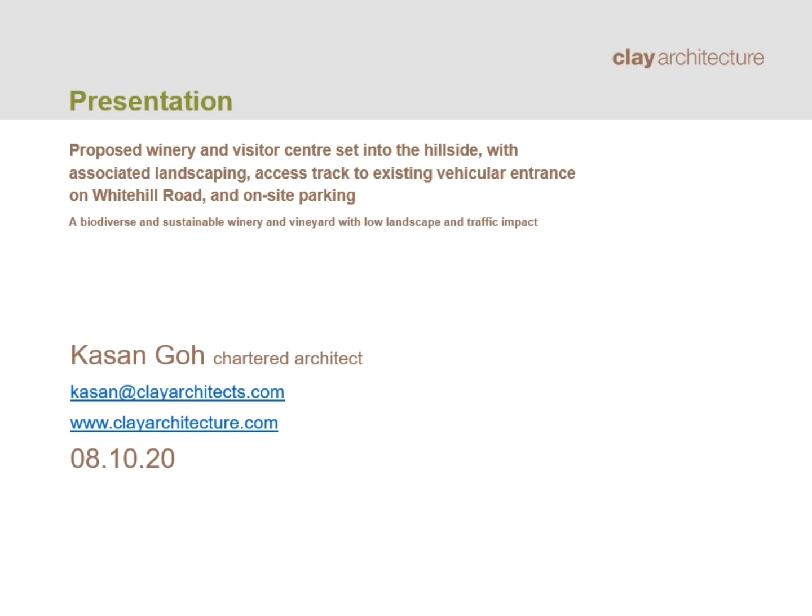It's a 25-acre site on a hillside. Of the 25 acres, only 5 acres have been cultivated with vines. The applicant is seeking to expand its vineyard, and this is being held back by the fact that it has no on-site facilities. The success of the vineyard depends on an on-site winery and a visitor center, which they would use for wine tourism. The site is set within the green belt, and it's opposite Kent Downs AONB.

The site for the winery was chosen through consultation with Gravesham Borough Council, and it was decided that the best place for a winery would be in the northernmost corner of the site, surrounded by tall trees and a hedge.

We carried out pre-consultation with Gravesham Borough Council, and this included preliminary highways comments from Gravesham Highways. We had pre-consultation with the Kent Downs AONB officer and pre-consultation with the Kent Biodiversity officer. On board our team, we have an ecologist, a civil engineer, a transport consultant, and an acoustician. Kent Highways will be consulted as part of the planning process. We are also applying to pre-consult with the Environment Agency.

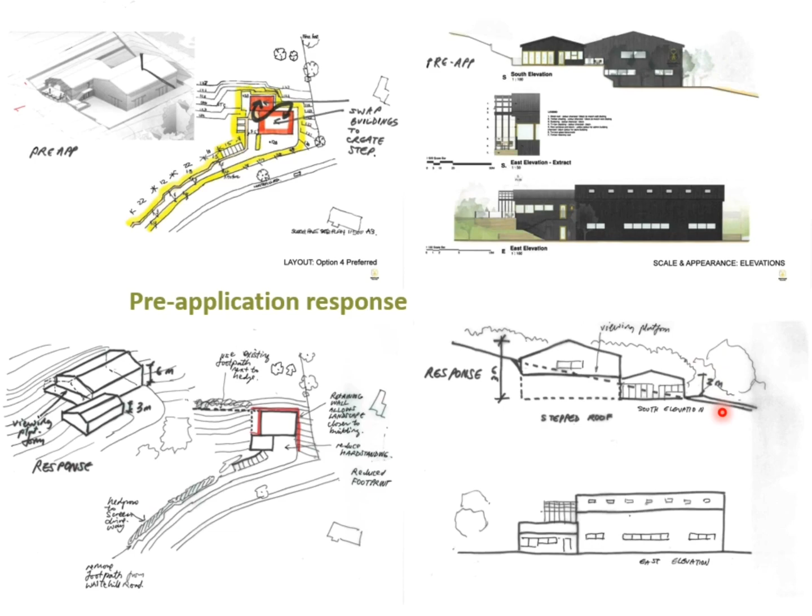So in response to Gravesham Borough Council's comments, you have the sketches on the bottom half of the slide, which show our idea of taking CC Studio's project, for instance, and moving the 6-meter tall building and burying it within the ground so that all you see is half of the building. This was an early sketch scheme of the idea.

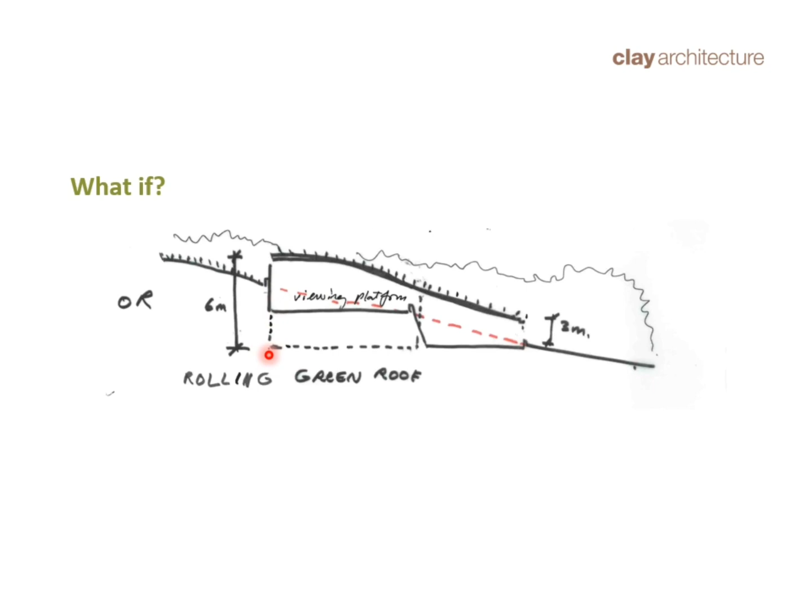However, after doing that sketch scheme, it occurred to us, what if we consolidated the building into one building rather than a 6-meter and a 3-meter tall building, but have it as one single building and set the whole thing in the hillside and design the roof to try and blend with the hillside more. This is something that we discussed with Kent Downs AONB, and they liked the idea.

Special grasses will be planted around the footpaths and within the vineyard, so the whole site will combine agriculture with biodiversity. We consulted with the Kent Biodiversity Officer on this at a very high level, and in principle they agree with the strategy for combining agriculture and biodiversity.

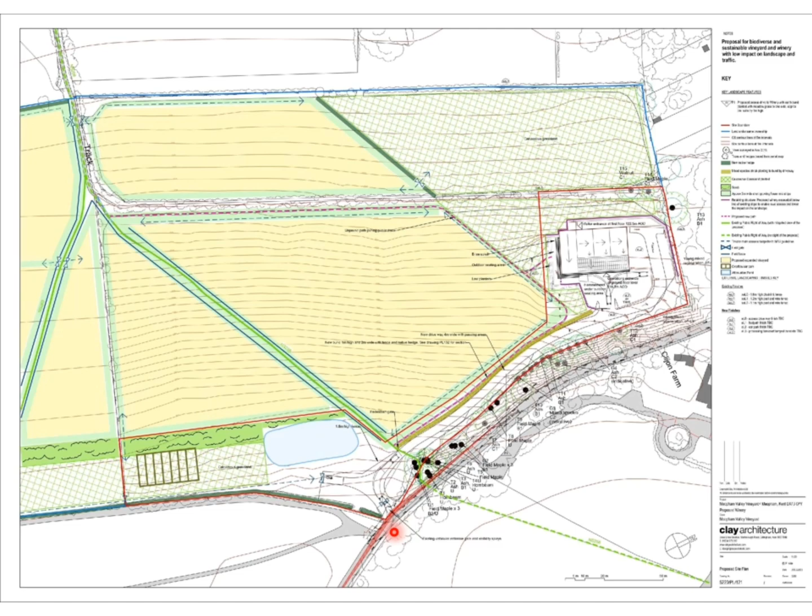Here we zoom into the site in greater detail. So that is your entranceway off Whitehill Road, a new driveway which is carved along the side of the tree line, and then this is the proposed winery.

So here we have existing footpaths which we're not changing. We will create a crossing across the driveway.

The yellow areas are the extended vineyard. This hatched area here is the local wildlife area, so it will be enhanced wildlife area.

The idea is to excavate the hill here and build the winery into the hill. The spoil that comes from excavation will be used to build a bund that will not only mask the mass of the winery, but will also be used along the side of the road of the driveway, and that will be planted with hedgerows. So this would all reduce the impact of the development on the landscape.

The idea for the bund was actually suggested by the Kent Downs AONB officer. So all in all, you will have a building sitting on here which is excavated and put in, and then the spoil would conceal that, and you'll be surrounded by wildlife area and vineyard.

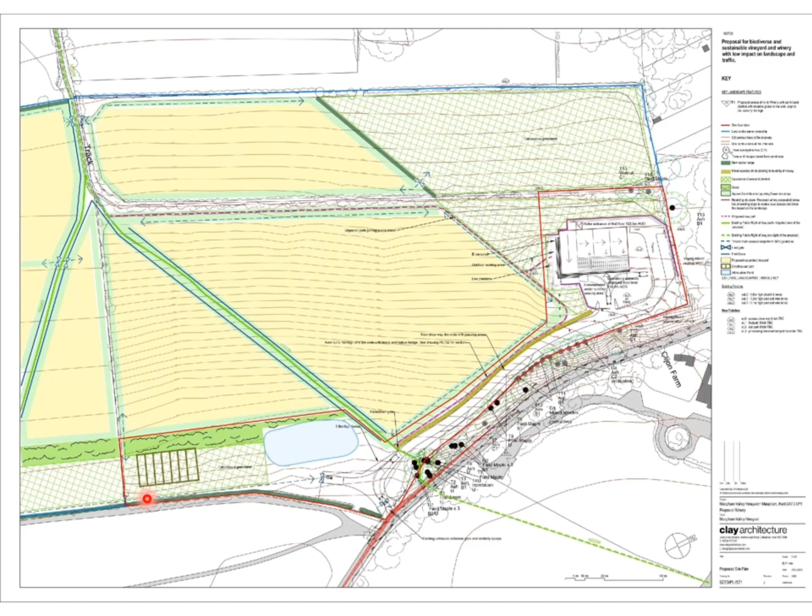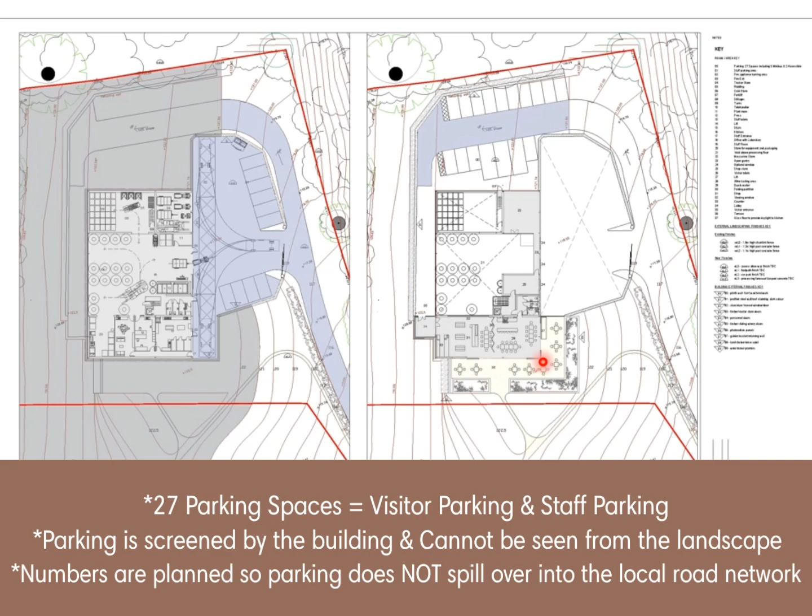So this area looks out over the valley and opens out onto a terrace. So you have outside seating. So in total you have enough seating space for 30 visitors on the inside and 30 visitors on the outside. Total of 60 visitors.

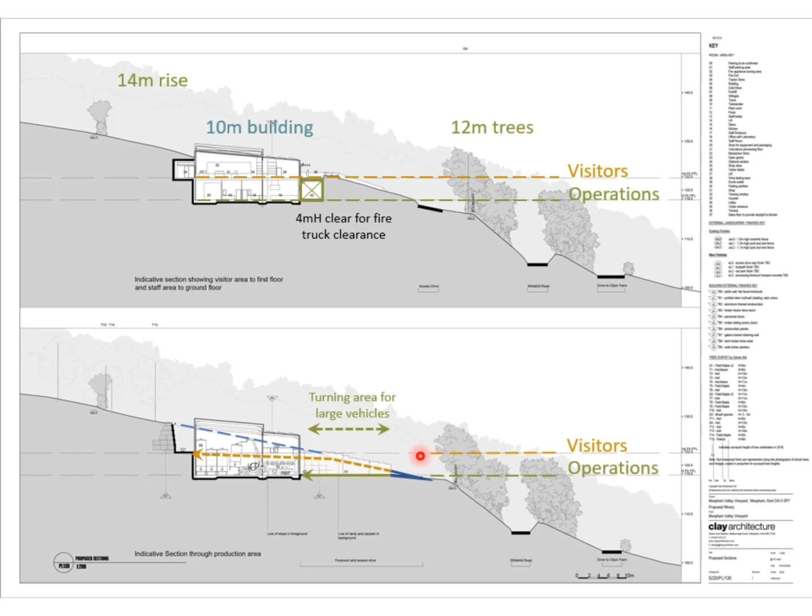This is a section across the building, which shows how the building is set into the hillside, with the wine production area at the lower kind of operations area at the lower ground level, and the visitors at the upper ground level here.

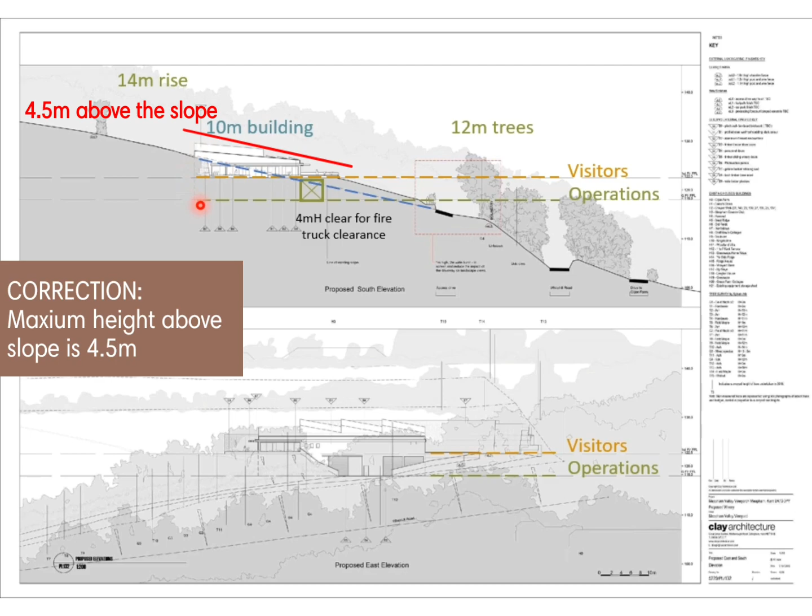This shows a detail of the view from the south, which is equivalent to the view from the Greenbelt area. And it shows again, this is all of the building that you would see from the south, which is the upper floor area with a maximum height of 4.5 meters sloping down. And you can see from the green line here that most of the building is hidden from view.

Below, this is the view from the east, and again, most of the building is hidden from view. These white lines here are the surveyed heights of the trees in 2018. The trees were about 12 meters high, and would have grown taller since. So this is the tree cover, and this is roughly what you see from the AONB site.

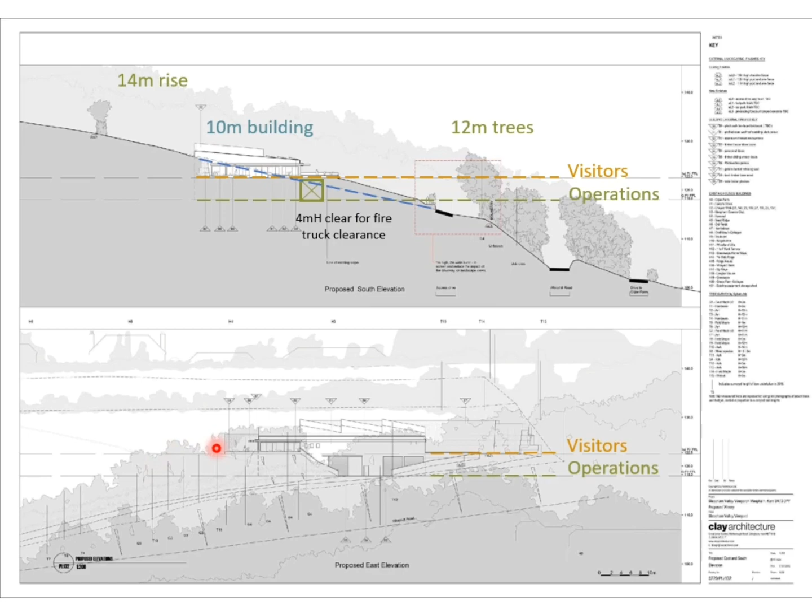Above here is a view from the north looking southwards, and again you see this little white bit here is what you will see. This is a view that few would see because it's screened by a whole wooded area, and the building is buried, so all you will see is that.

This is the view from the west, and again you see that the building is substantially below ground. Here's the building with the little roofs peeking up above, but that grey line indicates the slope line, and that line indicates the line of the operations area. So that's how much of the building you'll actually see, not very much at all.

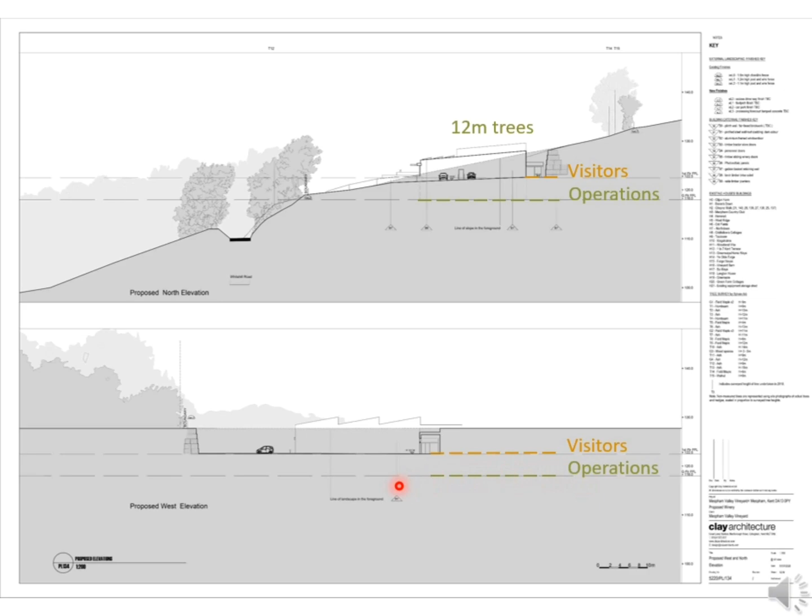To reiterate, this is the simulated view from the east. This simulation was built using actual trees and actual height and survey information, so it's fairly accurate about levels and trees. Here we show the view from the south again.

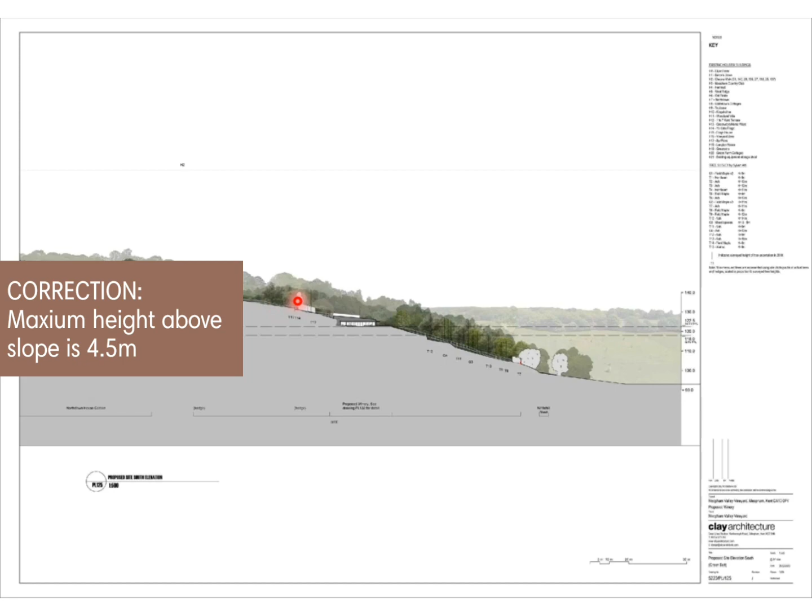Now you understand that only a single story, 4.5 meters or lower, shows above ground, and the rest is below ground. This is significantly less than the 6 meter tall building that was presented at pre-consultation with Gravesham. So at pre-consultation, the original design was a building 6 meters above the slope level.

The revised and submitted proposals show a building that is 4 meters or less above the slope level. The building is largely screened by earthworks, hedges, and the copse of trees along Whitehill Road. The proposed driveway will be hidden from view by a mound and new hedgerow.

We have had fairly extensive consultations with Kent Downs AONB. We're still discussing issues with her, but she is largely satisfied that the new proposals significantly mitigate the impact of the proposed development and will have a low impact on the landscape.

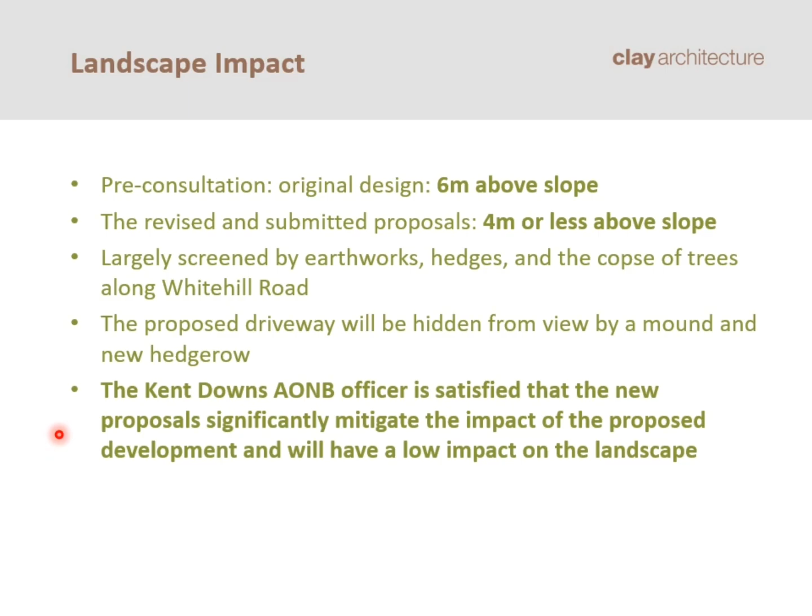The existing site, in terms of biodiversity, is mainly species-poor grassland, bounded with native hedgerows and deciduous woodland edge. The proposed enhancements include adding 626 meters of native species-rich hedges, adding wildflower grassland to the biodiversity area and to the attenuation pond, mixed species shrub border to the vine area, and calcareous grassland to the field margins and beneath the hedgerows.

There will also be grass species sown between the vine crop chosen to enhance ecology. We consulted the Kent Biodiversity Officer at a high level, and she agrees in principle with the strategy.

The interesting thing about biodiversity is that it actually improves the quality of the wine. It increases the resistance of the vines to disease and introduces pollinators to the area. So it is also very good for agriculture.

There have been some concerns about bottling. Bottling of the wines is a small part of the operations at the winery and does not occur all year round. A small bottling plant, for instance, can bottle up to 3,000 bottles per hour.

An entire year's crop, say 90,000 bottles, can be bottled in 30 hours, spread over a 16-week period. So we're talking about a week's worth of bottling spread over that 16-week harvest period. Bottling times will be staggered as white wines, red wines, and sparkling wines all have different processes and aging periods.

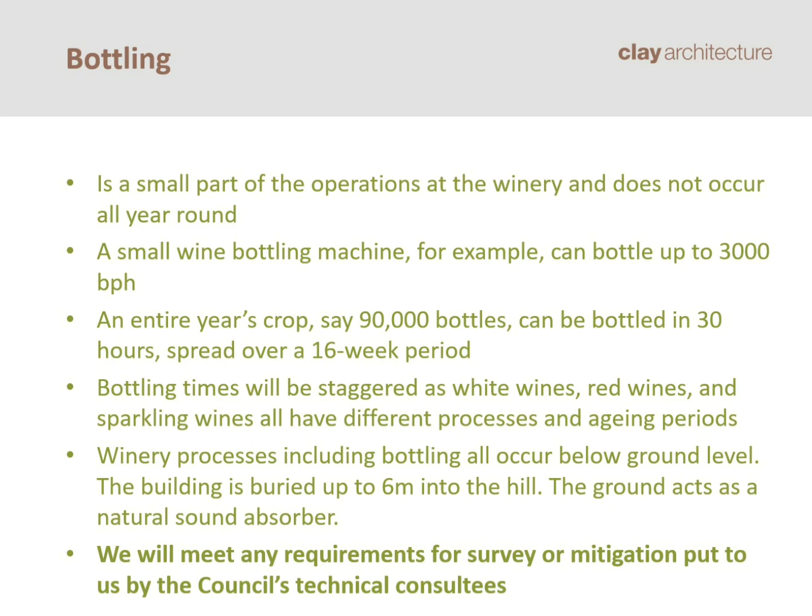We have engaged an acoustician who has made preliminary calculations into the impact of any noise. The noise to neighboring houses will be minimal. He estimates it will be about 15 decibels, which is hardly audible. We will meet any requirements for survey or mitigation put to us by the Council's technical consultees.

This is an example of a bottling plant used for bottling wine. We haven't gone into great detail here, but you can see even the bottling plant itself is enclosed, and that enclosure might itself reduce the amount of noise coming from the bottling process.

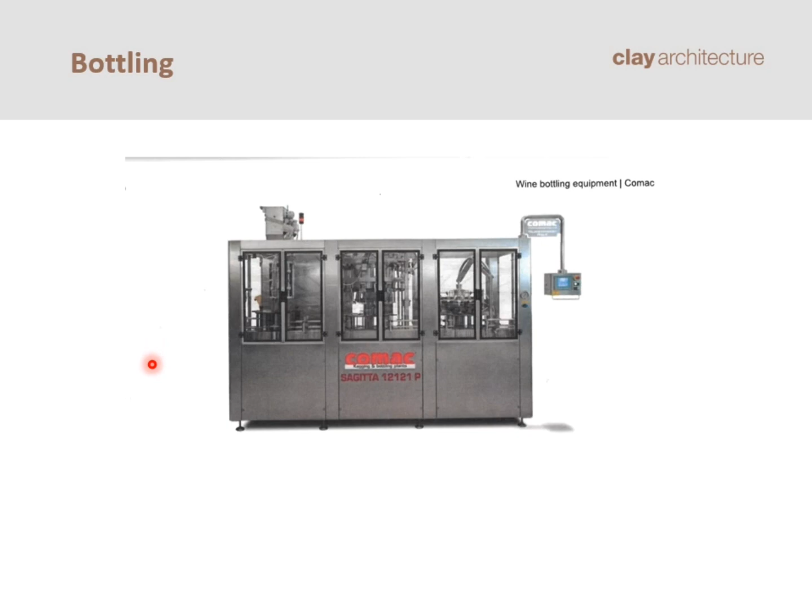This is an extract from our transport assessment.

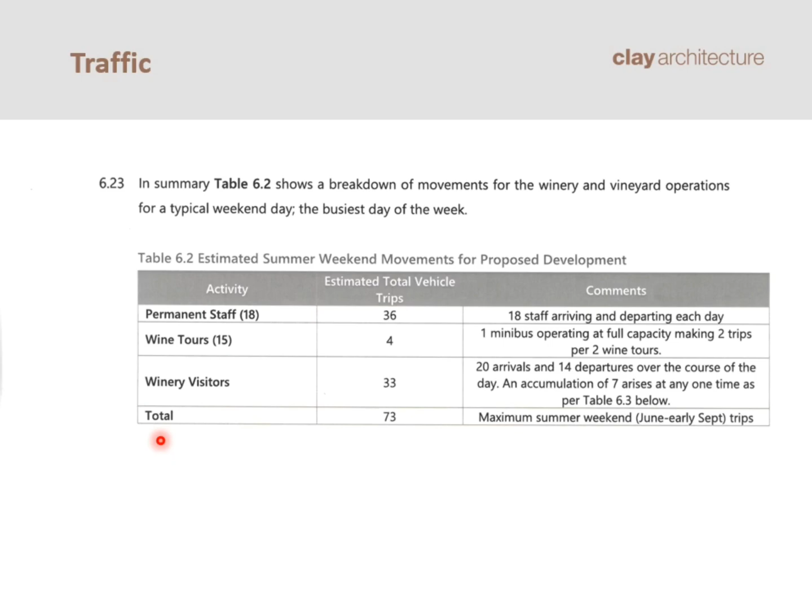The worst period for traffic coming to and from the winery is estimated to be during the summer months at weekends. During weekends you would have permanent staff manning the visitor center, wine tours, and visitors to the winery, calculated at a total of 73 trips per day during the weekend at the worst periods in summer.

Looking at the entrance, adequate visibility exists to meet DMRB standards, subject to cutting back the hedgerows.

Goods vehicles will have 1 to 2 larger vehicle trips per week during the bottling period of March to June. Deliveries and collections will mainly occur during this peak period, with a maximum of 1 to 2 vehicles per week. Most visitors and agricultural staff will be ferried to and from site by minibus, which seat 15 persons each. One minibus is equivalent to 7 cars, so this reduces the number of trips.

It's important to understand that most visitors will come through wine tours and wine trails, and the operators of these tours and trails do this exclusively by minibus. The winery also has its own minibus, which it uses to ferry agricultural staff.

We're investing in a minibus to collect visitors from the major train stations around Ebbsfleet, Gravesend, and Meopham, and ferry them to and from the site. This will reduce car journeys significantly and also enable people to drink when they come to visit.

So the 73 total trips is equivalent to an average of 8 trips, arrivals and departures, an hour. That's 8 vehicles using Whitehill Lane an hour at weekends during the summer season only, which can easily be accommodated by the local highways network.

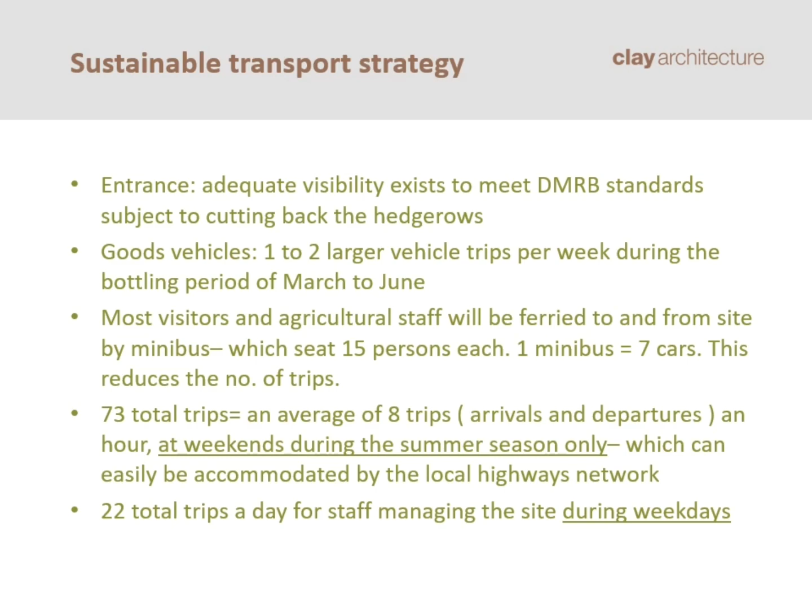It's also important to point out that the larger vehicle trips, for example delivering or collecting bottles, will occur during the weekdays rather than during the weekends.

Proposals will create jobs for the area. Vineyard maintenance, including pruning, bud rubbing, bud tucking, wiring, grass and weed control, dealing with disease and pests, and trimming of wires, will create an additional 30 part-time jobs. This is equivalent to 6.45 full-time equivalents.

These jobs will be sourced locally. The winery uses local agents, and most of this is semi-skilled labor that will be sourced locally, coming from the surrounding areas.

The Visitor Center and Winery will need office staff, cellar door shop staff, winery production staff, kitchen staff, and vineyard tours and tasting staff. These will create 12 new jobs, equivalent to 8.4 full-time equivalents. Again, these will be mainly locals.

I have to stress that, especially agriculture staff, these will be brought to site by minibus. Harvest will need an additional 37 pickers. In total, harvest will need something like 62, but 37 on top of what they already use. This, though, is very short term, 3 days work once a year during the harvest period, so it hasn't been counted in our calculations for job creation.

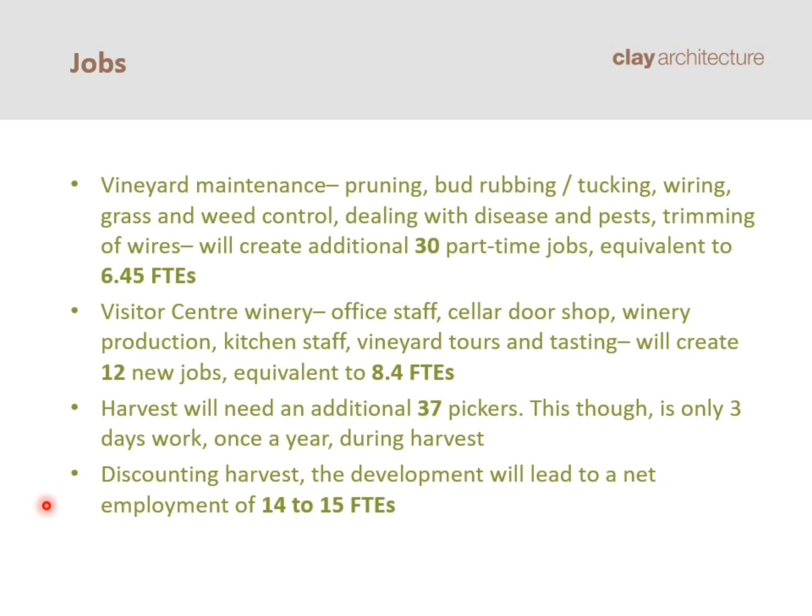Discounting the harvest, the development will lead to a net employment of 14 to 15 full-time equivalents.

In conclusion, the proposed facilities are critical to the sustainability and growth of the vineyard to its full potential. The vineyard has been in existence for 15 years and has been hampered by a lack of facilities, which is why, up to now, it has not been able to extend the cultivation area beyond 5 acres. So this is critical to the project.

Steeply sloped, unproductive agricultural land will be transformed into prime vineyard with enhanced biodiversity and wildlife features. The visitor center allows the winery to diversify into sustainable rural tourism and attract visitors through wine trails and wine tours, which, through a sustainable transport strategy, will keep the number of journeys low and have a low impact on local road networks.

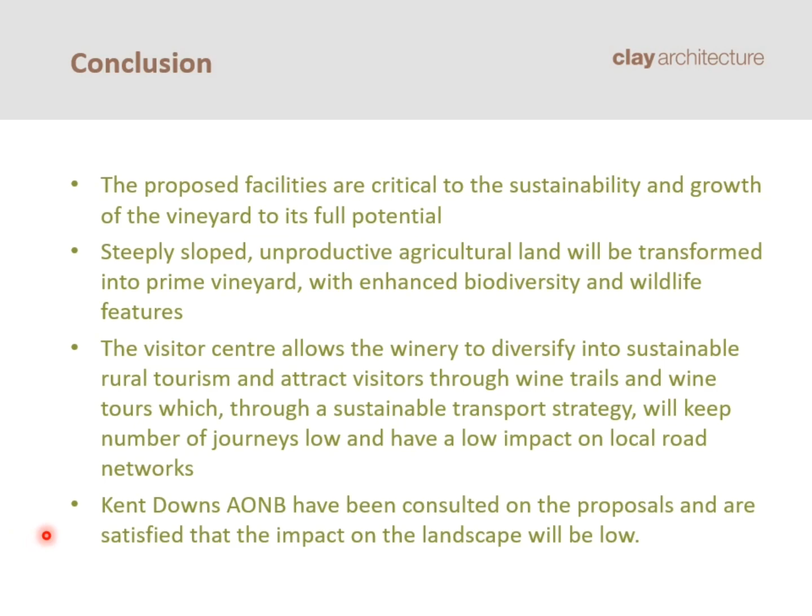Kent Downs AONB have been consulted on the proposals and are satisfied that the impact on the landscape will be low. The expanded vineyard and winery will create 14 to 15 new full-time equivalent jobs.

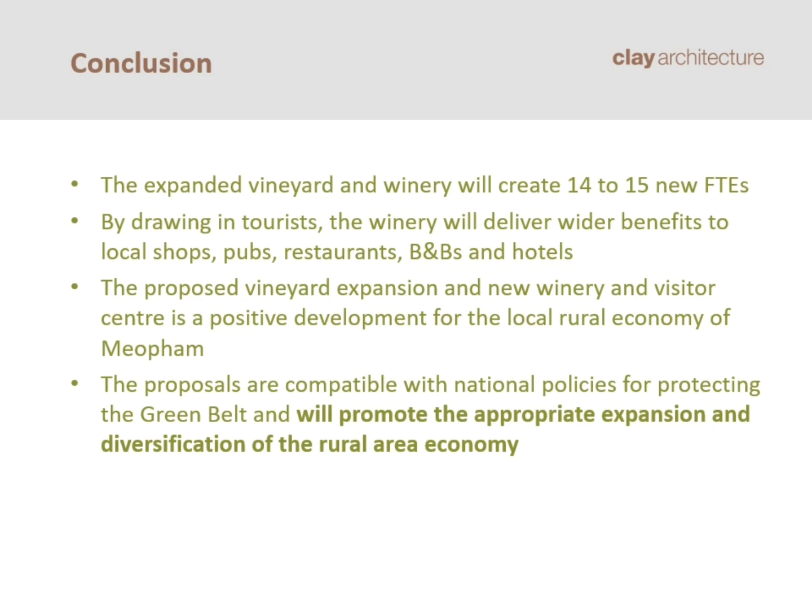By drawing in tourists, the winery will deliver wider benefits to local shops, pubs, restaurants, B&Bs and hotels. The proposed vineyard expansion and new winery visitor centre is a positive development for the local rural economy of Meopham. Proposals are compatible with national policies for protecting the green belt and will promote the appropriate expansion and diversification of the rural area economy.